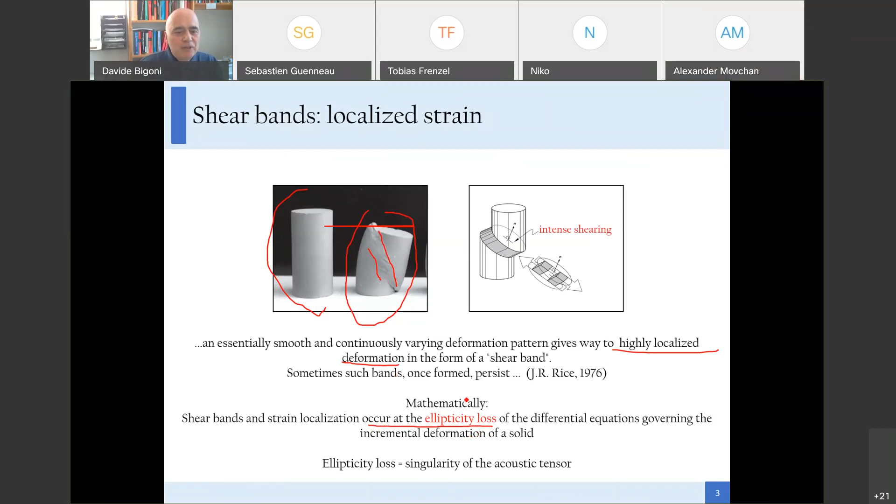Often shear bands persist, and these are examples of shear bands that I have encountered in my life. We see the sample from before, and here another example of a sample where the shear bands have an X shape—two inclined shear bands equally inclined with respect to the vertical direction.

Another example of the same kind of localization is this, where we see damage inclined into two shear bands. This rock, and also this other rock, which I like because this is a runestone. It's a photo of a sample exposed in the Museum of Edinburgh.

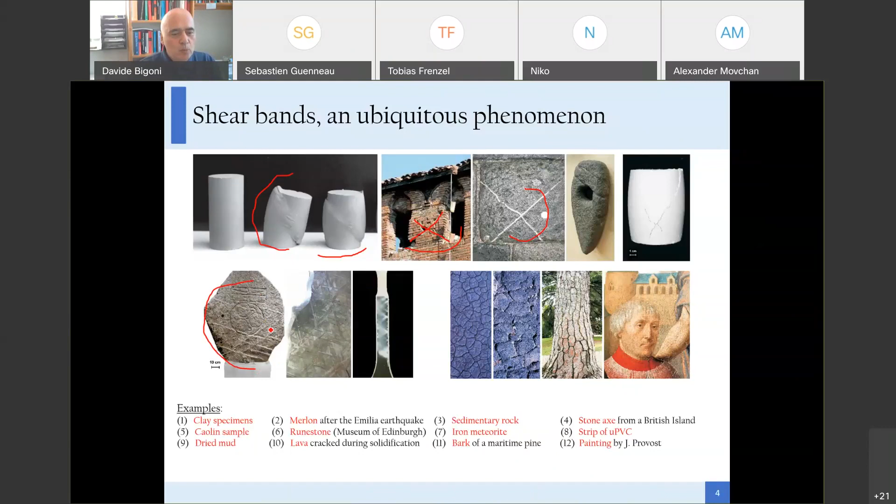I like to think that all these shear bands you may see here were considered by ancient people as signs of God. Other shear bands are here in an iron meteorite, and this is a piece of plastic where we see again the same shear bands.

Often what we see is the signature of shear bands, because shear bands often degenerate into a regular pattern of fractures. We see here fractures in mud, here in a tree trunk, in a painting, and so on.

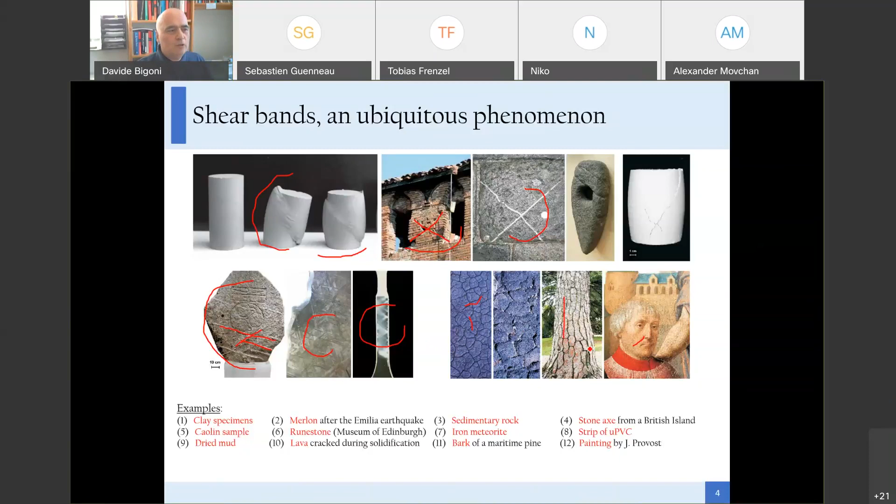So what I'm proposing today is the following. Usually shear bands are accompanied by large plastic deformation and just emerge before failure. So they come together with damage and eventually fracture.

Moreover, the mechanical features of shear bands are dictated by the material. For a certain material, there are a certain number of shear bands, a certain inclination. If we would like to change these features, that's difficult because we have to change the material.

Nowadays we are looking to architected materials. These are materials with extreme properties, for instance foldability, channeled response, surface effects, and we would like to have the possibility of switching shear bands on and off without any damage, because in this way we will pave the way to the use of a material that can be designed to produce these kinds of instabilities.

Our idea is to be able to exploit these instabilities for practical purposes. In this sense, shear bands have to occur well inside the elastic range and far from failure. Otherwise, we will not have the possibility of switching them off and on.

Shear bands should be designed to have desired features—inclination, number—and we would like to have a system to induce or inhibit the appearance of shear bands. All the mechanical parameters in our artificial materials, we would like to have rigorously determined, possibly analytically.

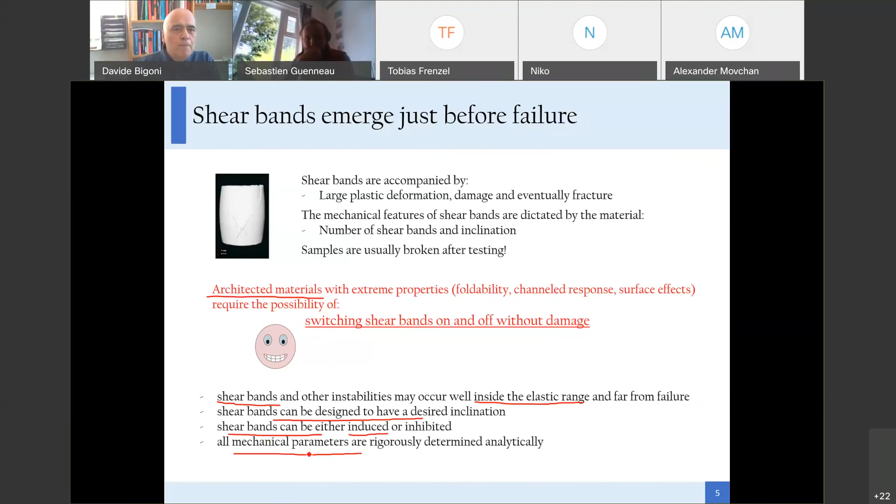So how to solve this problem? Well, I'm proposing you to use a specific kind of artificial materials that we see sketched in this figure.

So the idea is to use periodic two-dimensional grids of axial and flexurally deformable elastic rods. These elastic rods have to be axially preloaded in tension, as you see in the sketch, or in compression, and subject to in-plane incremental deformation.

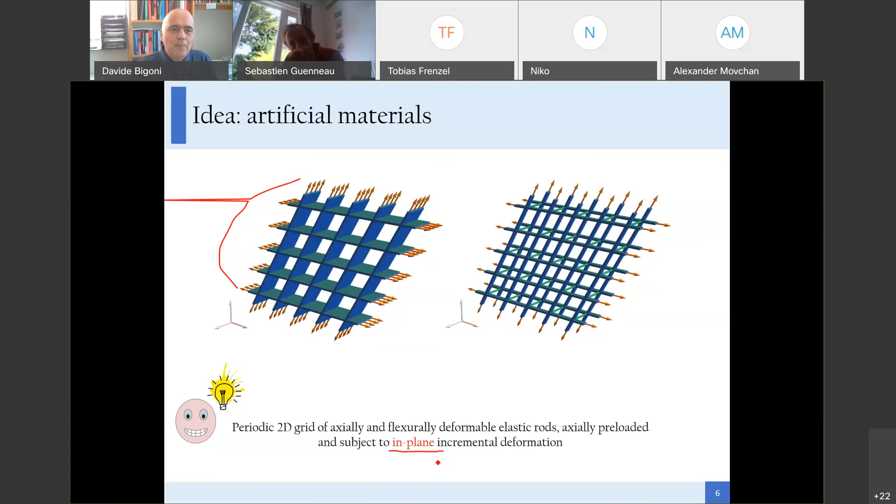I'm highlighting this concept of in-plane because in the literature there are a bunch of results for structures loaded out of plane, but in this case we are working in the plane. So every elastic rod is subjected to bending moment, shear force, and axial force. So the idea is to take a grid and subject it to tensile or compressive axial force, and then perturb it with a deformation inside the plane.

What we have to do to treat this problem is to consider the equations governing axial wave propagation and transverse wave propagation for time harmonic assumption. So we see that we have to deal with the mass density, the linear mass density of the rod, the axial displacement, the circular frequency, the axial stiffness of the rod, which is usually written as EA.

And now what we see is that these parameters depend upon the pre-stretch that we impose before the incremental deformation. So the first equation is for axial deformations, and the second equation here is for transverse vibrations, where V is the transverse displacement.

Omega is always the frequency, the circular frequency. Gamma, the linear mass density. B is the bending stiffness, often written as EI. P is the effect of the preload here. And eventually we see that we have also introduced the so-called rotational inertia, which means that our beam model is a Rayleigh beam model.

Of course, the Euler-Bernoulli model is recovered when gamma R is set equal to 0.

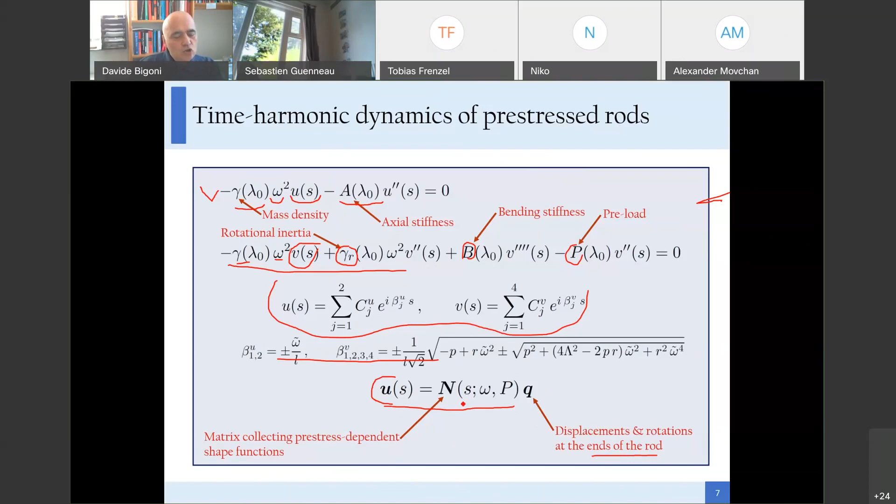Don't be confused about the name shape functions, because these shape functions are rigorously determined analytically, so there is no approximation here.

And finally, the potential energy contains the effect of the pre-stress P loading the elastic rods. So all these equations end up in a prestress-dependent stiffness matrix. There is nothing particularly new here—this stiffness matrix is known and has been determined analytically.

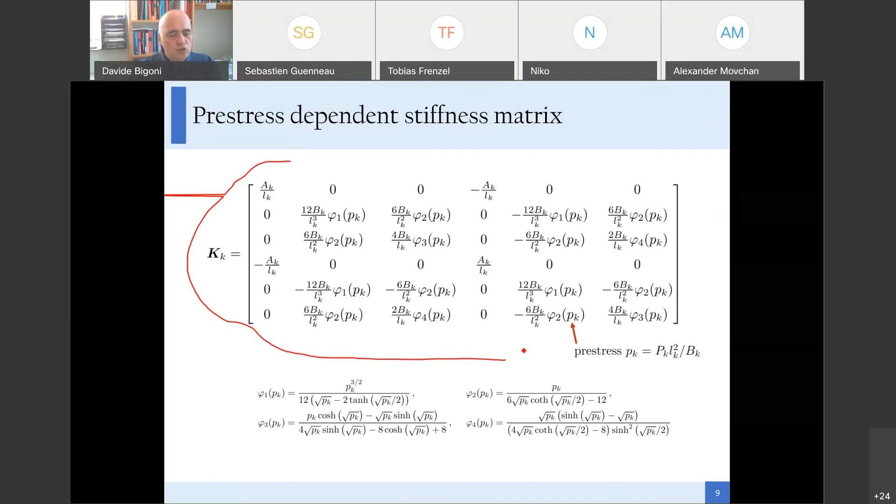And now we are in a position where we have to select what to do. So we can follow two ways: one way is to use homogenization, which I will speak of in a few minutes. The other way is to directly use these equations for the grid, introducing a Floquet-Bloch technique.

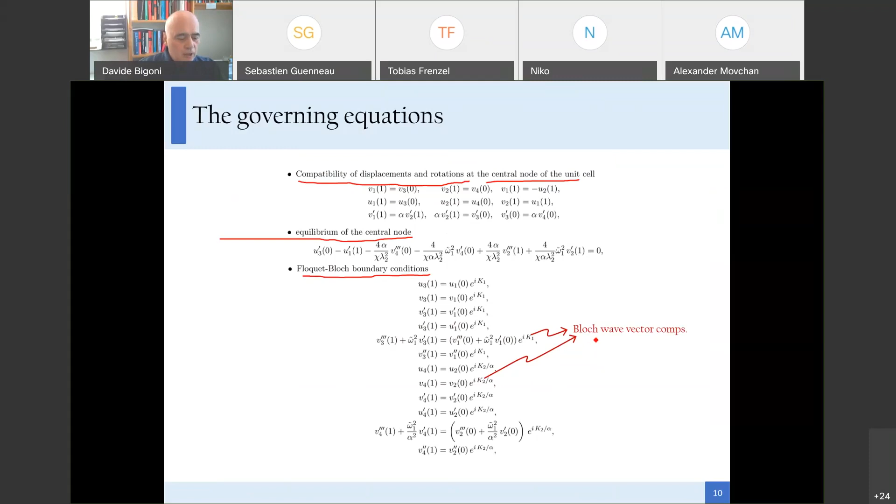If we do this for the grid of the beams, we arrive at a dispersion equation, which depends on the aspect ratio between the length of the rods, the ratio between the cross-sectional areas of the rods, and the slenderness of the rods.

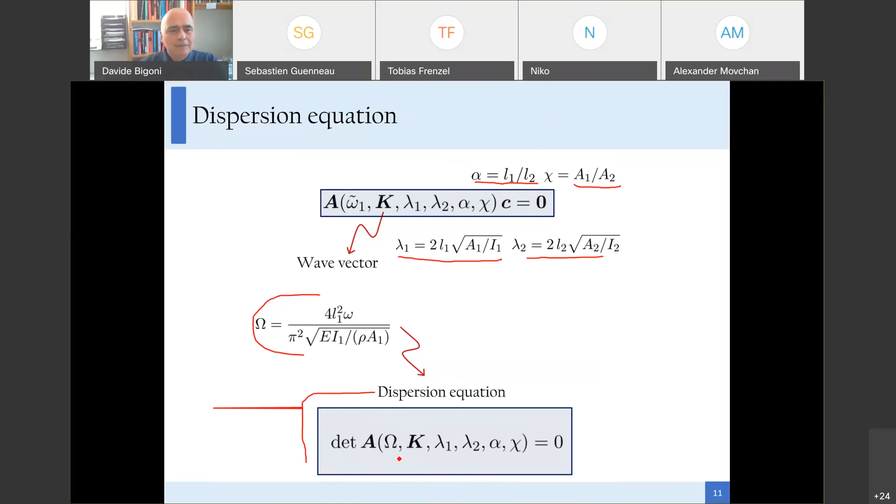Eventually, through a renormalization, we arrive at a final expression for the dispersion equation, which is this one. This equation can be solved numerically up to a desired precision, because the solution of this equation is not a real problem. In this way, we obtain results in terms of dispersion surfaces.

So these surfaces are very popular nowadays, but to tell you the truth, they leave me a little bit cold, because it is something that is not particularly interesting to see.

For instance, on the left we see the dispersion surface obtained in the limit of the Euler-Bernoulli behavior. In the center, when the Rayleigh beam enters into play, we may see that the difference between these two is only evident at high frequency, and this is expected because rotational inertia only plays a role at high frequency.

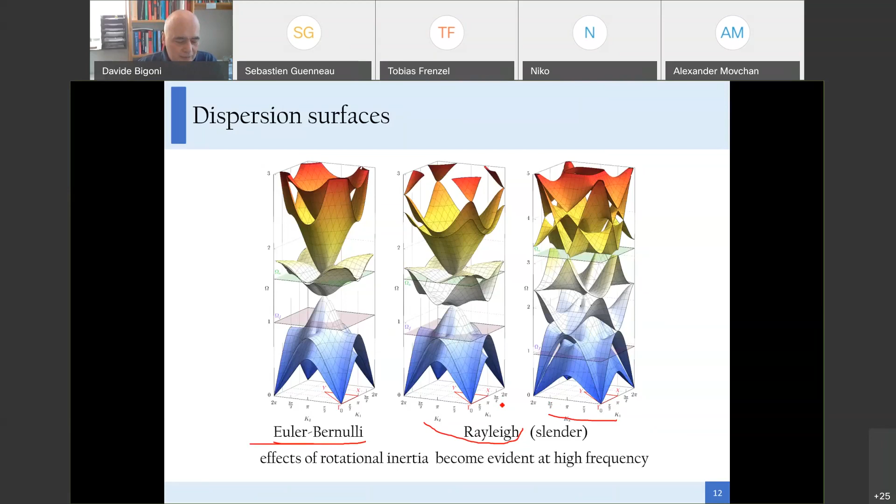And on the very right, we see another example where we have played with the slenderness of the elastic rods. So I don't have much to say about these surfaces, except that we can try to hunt for special features.

And we may see here a couple of these special features. For instance, on the left, we see here a flat band. This means that we have an infinite set of standing waves propagating all at the same frequency, which is exactly 1.971. And this occurs at a slenderness ratio equal to 6.192, exactly at that slenderness and exactly at that frequency.

Or if we look to the right, we see other things that we can do with these dispersion surfaces. We can look for Dirac cones. There is one here, another is there. There are many more, so another is here. But this is not the thing I would like to speak about.

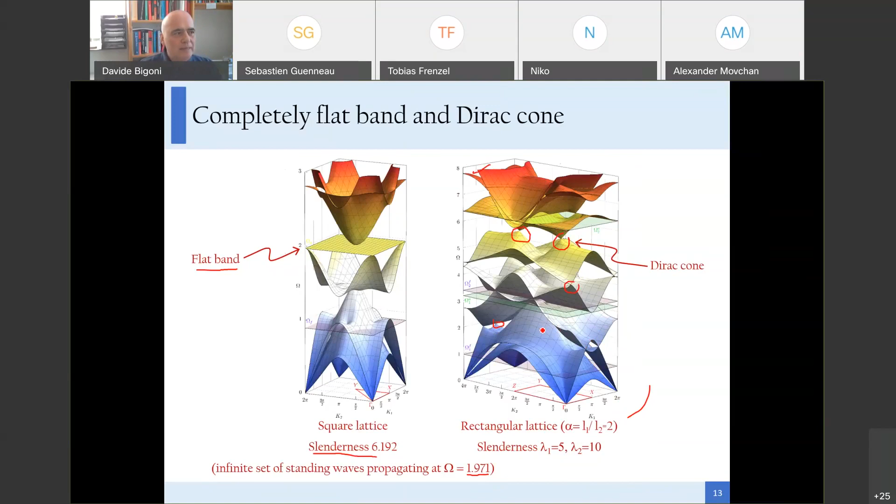I would like to concentrate on the second possibility. The second possibility is to introduce the homogenization of the lattice to get an equivalent solid, because our goal is to obtain materials which behave in a particular way, determined before doing calculations, possibly analytical calculations. So we would like the two-dimensional grid to behave as a material.

And so this is the homogenization problem. We start from a stress-free configuration. The stress-free configuration is pre-stressed, say, in tension, but it can be pre-stressed also in compression, to get a grid which is larger than the initial configuration. And the current configuration is perturbed through an incremental macro deformation, which introduces bending, shear forces, and axial incremental deformation. So the lattice is two-dimensional, periodic, and subject to in-plane incremental deformation.

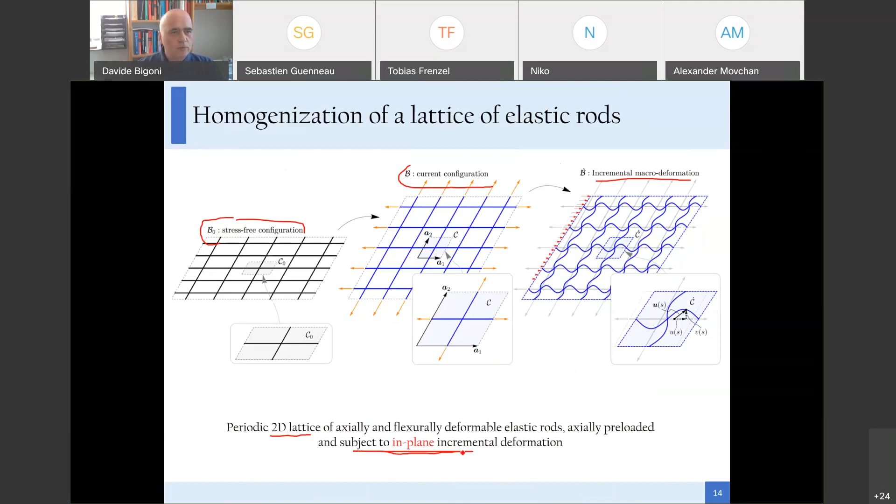So if we want to continue with the way of homogenization, we have to introduce a unit cell. This unit cell is generic, and in fact, we have developed a tool which allows us to treat completely generic cells, and we have to impose the conditions coming from the spatial periodicity.

In dynamics, they are called the Bloch theorem, which is this. In statics, they are called the Cauchy-Born hypothesis. It is a way to enforce spatial periodicity of the system. So this is from the point of view of the lattice.

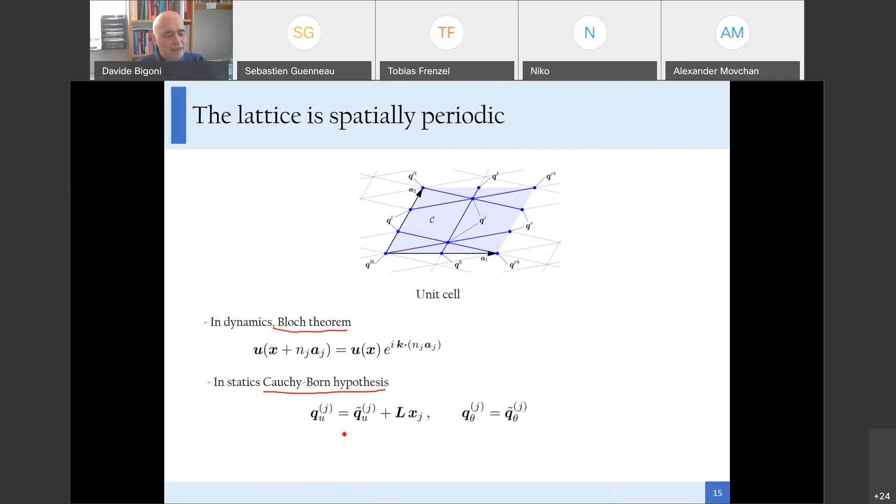Now let's have a look to the point of view of the continuum. We have to compare with the continuum, which is initially stretched homogeneously and then is subject to the incremental deformation.

So the form of the comparison material of the equivalent continuum is standard. And what we do have to impose in the homogenization scheme is to match in statics the first order energy in the continuum with the first order energy in the lattice. And similarly, we have to enforce matching between the second order energy in the continuum and the second order energy in the lattice. This is what we have to do.

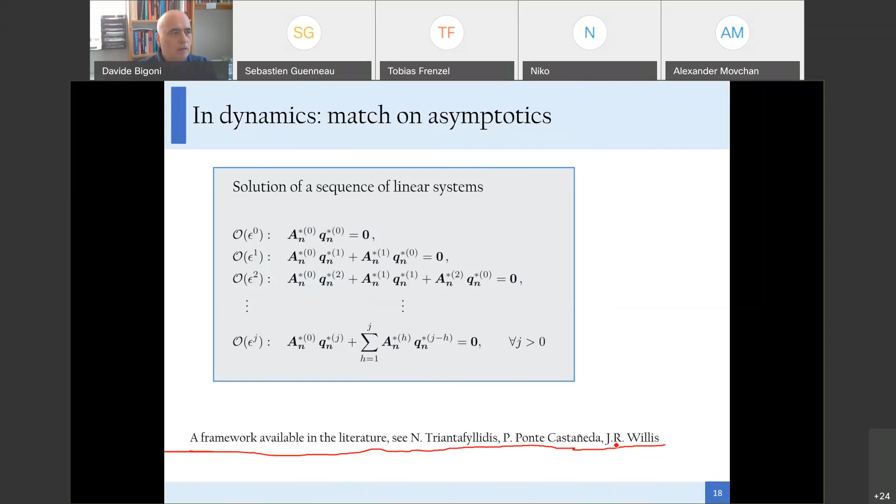So before showing the results of the homogenization of the lattice, I would like to speak about the role of homogenization. So I would like to put a question on the table: when homogenization does work and when does not. So I would like to start with a few examples of experiments that I have found in the literature.

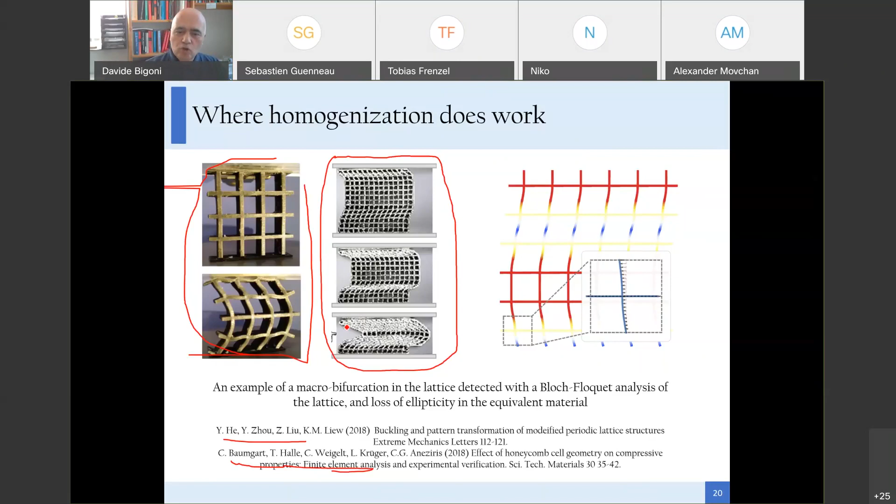We see it here. This is the analytical computation of this situation, and we see a form of global bifurcation. When the grid has a global bifurcation, it has been proven by Triantafyllidis and Ponte Castañeda that this instability corresponds to loss of ellipticity, and as I said, it corresponds to shear bands or localization of deformation. This is the case where homogenization works.

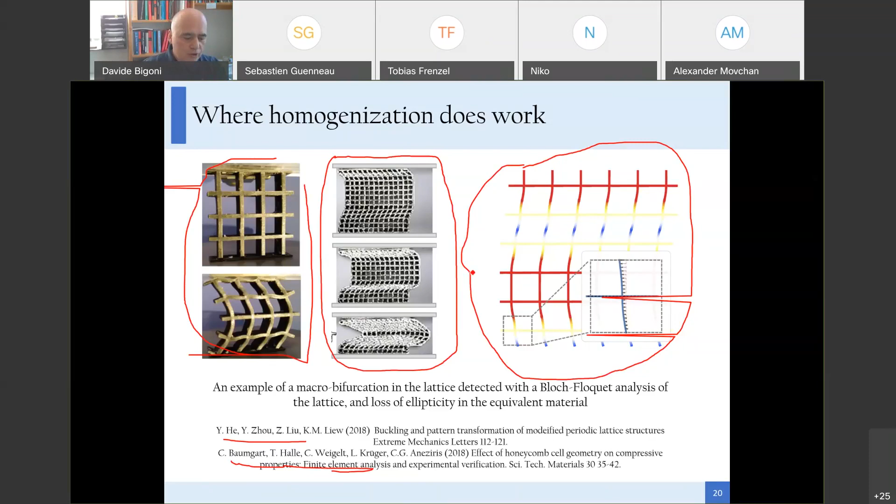This other case is an experiment that I did in my lab, and it is a compression, a confinement compression of a stack of drinking straws, which are arranged initially in a hexagonal geometry. And then when we squeeze the sample, we see almost immediately the formation of an ovalization.

We see that the ovalization quickly spreads throughout the sample. After this ovalization, we eventually see the localization of deformation into bands, and this localization progressively accumulates. But the first instability is this kind of ovalization.

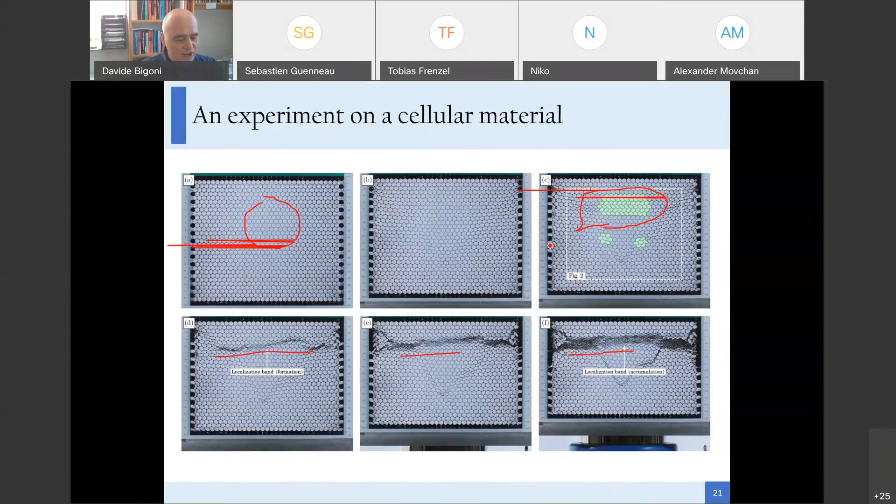If we analyze this instability from the theoretical point of view, we came to the conclusion that this is an example of micro bifurcation. It's a bifurcation occurring in the lattice, but it's not an instability for the equivalent continuum. So the equivalent continuum does not see this kind of instability, and it does not work as a material able to capture it.

So this is the situation: we have two possibilities when we load a grid of axially preloaded elastic rods. The first possibility is the early occurrence of a microscopic bifurcation. In this case, the homogenization scheme does not work because this microscopic bifurcation remains undetected in the equivalent material. So from this point of view, the equivalent material is somehow useless.

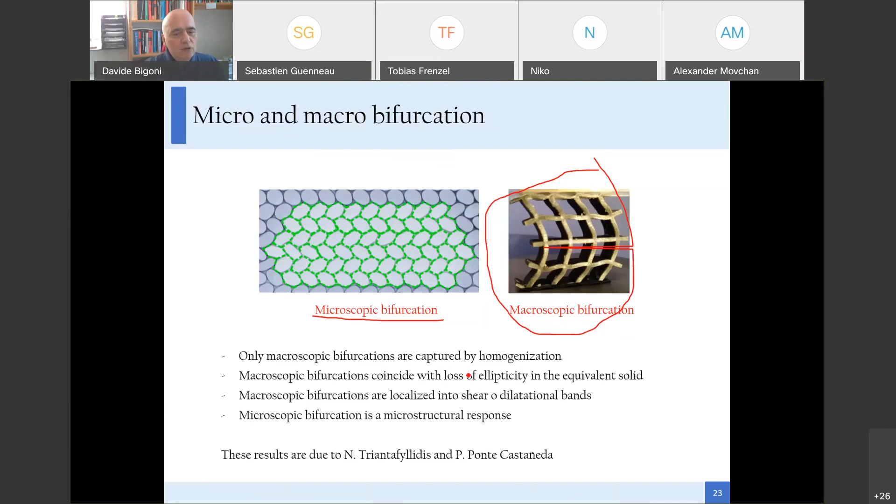In other cases, we see something different: a macroscopic bifurcation like this one, detected both in the grid, in the structure, and in the equivalent continuum. In the equivalent continuum, it corresponds to a loss of ellipticity of the equations, meaning a possibility of localized deformation in terms of shear band or dilational band. These results are not our own, but have been demonstrated mainly by Nick Triantafyllidis and Ponte Castañeda.

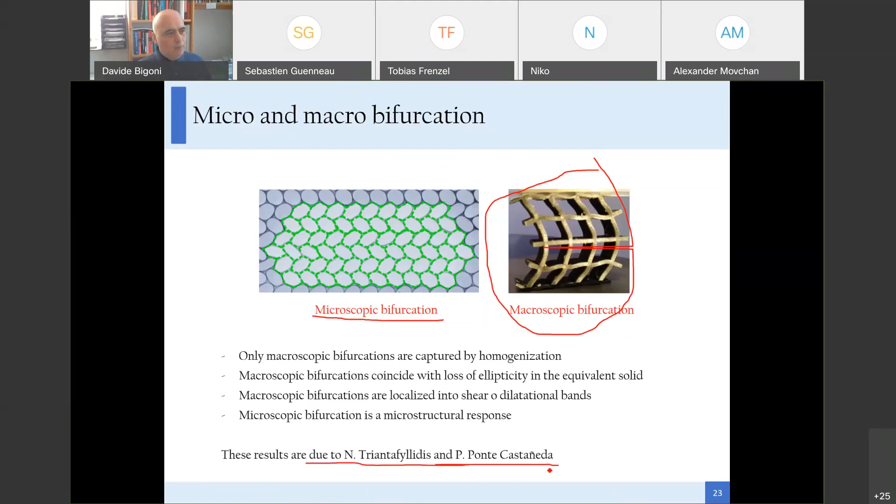Now I would like to show you an example. We have selected this grid of inclined rods. The rods are inclined at angle alpha and have been reinforced through linear springs, which only provide transverse reinforcement to this grid. With this structure, we are able to apply the homogenization tool and define the equivalent material. The first thing we have to do is obtain the prestressed tensor in the equivalent solid.

We see that the formula is pretty nice. It's this one: on the left, the Cauchy stress in the equivalent material. Alpha is the inclination of the grid, L is the length of the rods, and P1 and P2 are the two components of prestress in the elastic rods. This is first order.

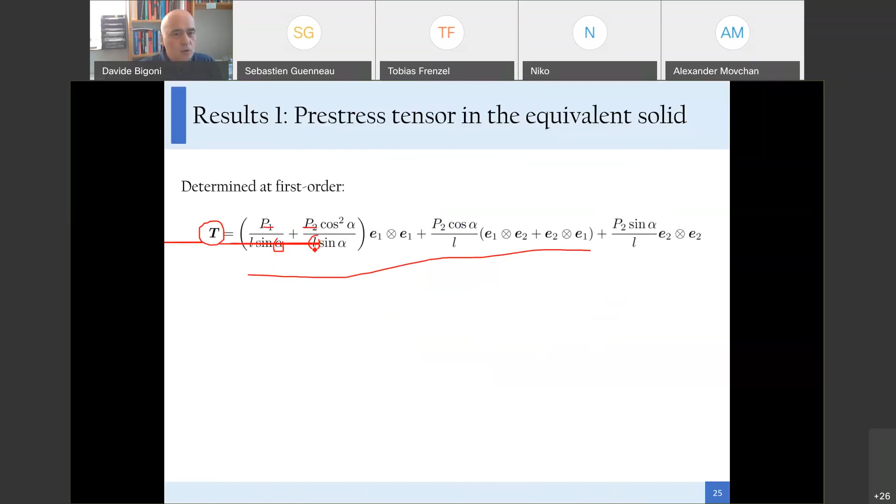But now, of course, we have to go to the second order, which is the most important part, and things become a little more complicated. We have 10 components for the elasticity tensor C, listed here. Don't be afraid of this formula, because they are all analytical and can be treated easily using a symbolic manipulator. So we can write down and use this equation to design our material. Our goal is this equation: define an artificial material that can be designed by us, since we can change the inclination of the rods, alpha, the ratio governing stiffness, the slenderness of the rods, and so on.

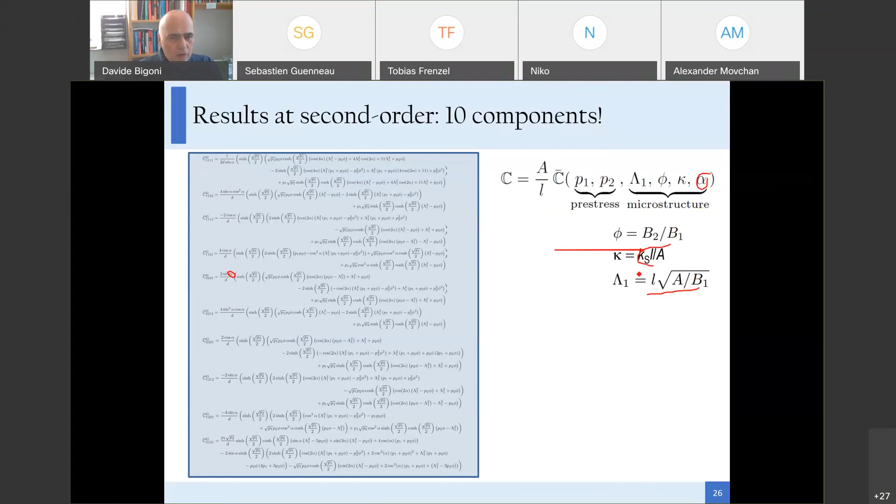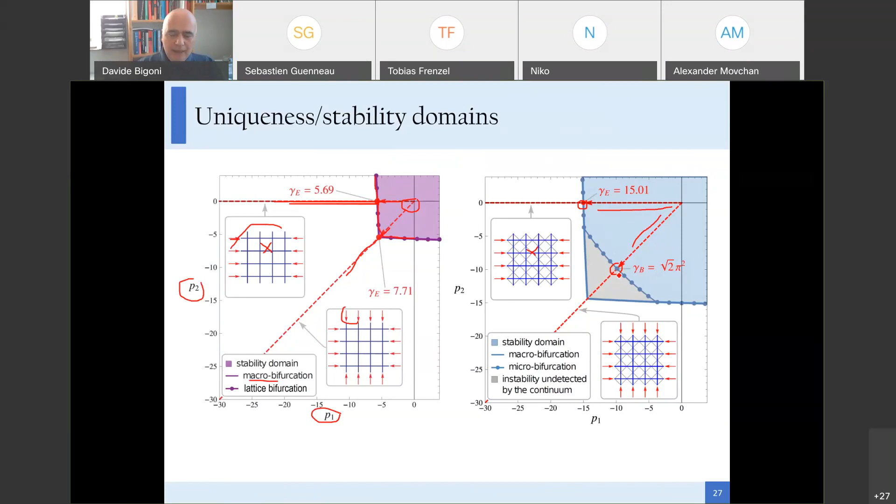We have introduced these conditions, and now I would like to show you something, because you might wonder why a macro bifurcation should correspond to a localization of deformation to a shear band. Maybe this is not yet clear. To make this clear, we have to reveal the existence, the possibility of localized deformation. How to do this? We use a strategy we developed years ago.

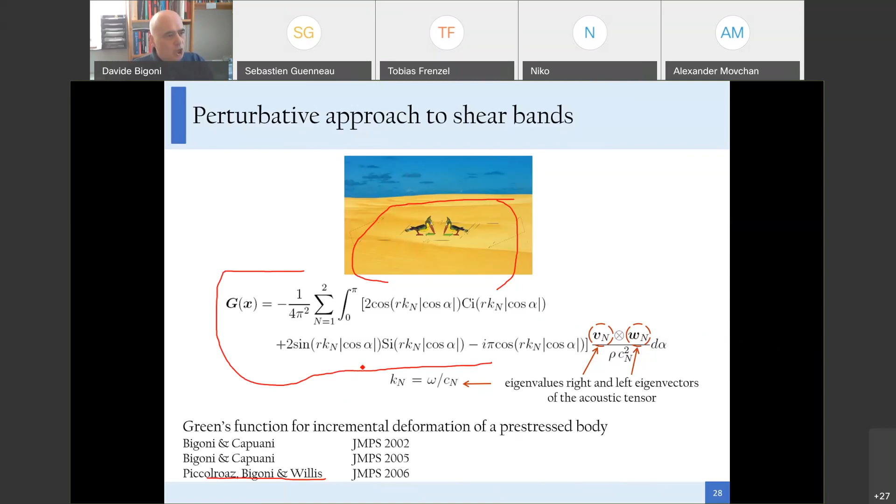This Green function can be given an explicit form in this way. This formula was obtained some 10 years ago or so. We can use this formula analytically to see how the material behaves near the border of ellipticity loss, the comparison material and the grid. And here we have the results.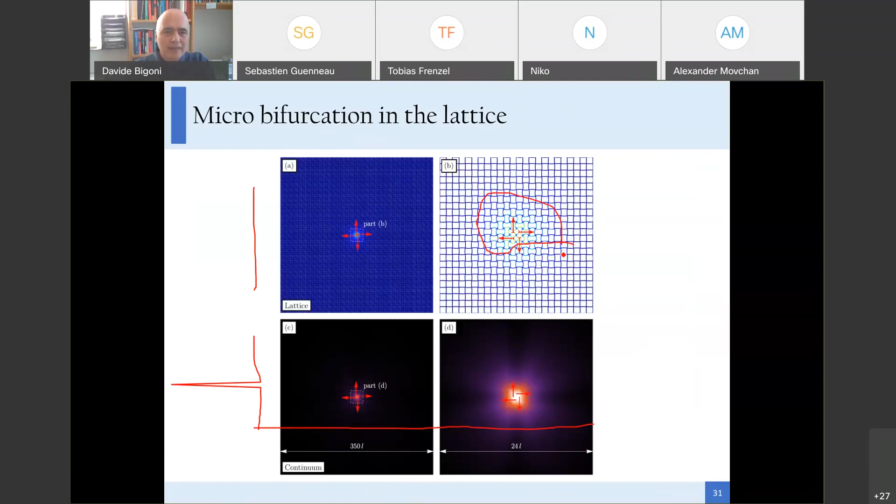We may see this more clearly here. These are results obtained with finite elements. We are applying a dipole into the grid, and this is what happens when we are exactly at the load for micro bifurcation.

So if we are exactly at that load, we don't see much. But if we move just beyond, say P1.05 or P1.1, the critical load, then we see there is a sort of explosion of the material. The micro bifurcation, which is undetected in the homogenized material, spreads throughout the whole body.

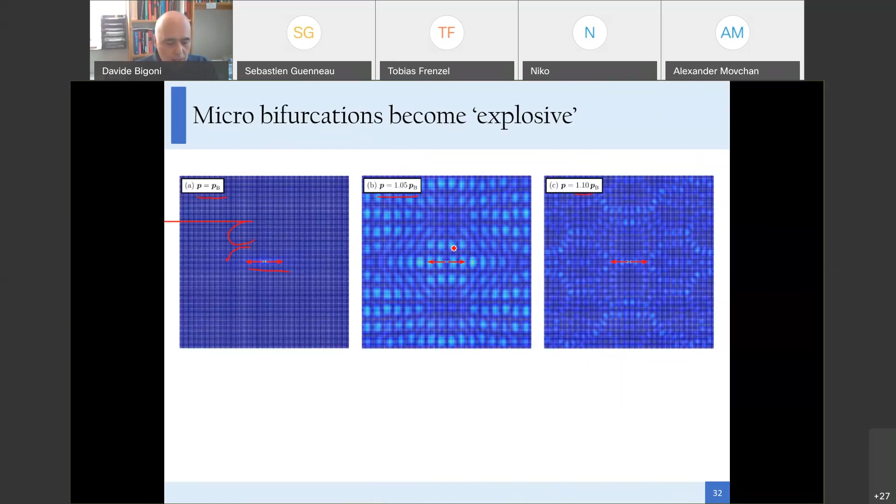So I would like to continue presenting results on the dynamics of shear bands. After 40 years of research in shear bands, many problems are still unsolved. One of these problems is: how do shear bands behave under dynamic excitation? Now we are in a position to try, because we have a homogenization scheme working for dynamics, and we also have a perturbation, a Green function, working for dynamics.

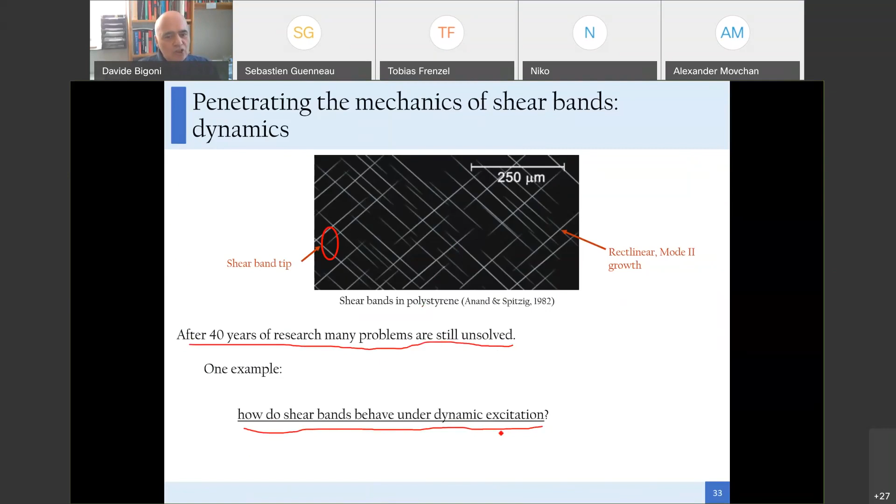So this is our goal: to look at homogenization in dynamics using Floquet-Bloch wave asymptotics. In this case, instead of the elasticity tensor, the tool brings us immediately to the acoustic tensor. Then we have to derive the elasticity tensor, if we need it, by taking the derivative with respect to the propagation of waves of the acoustic tensor.

Now, how do things work here? This is a result obtained for one of the cases where macro bifurcations dominate, so the first bifurcation is the macroscopic bifurcation, and homogenization here works well. These graphs are slowness contours evaluated analytically, and what we see is that initially, at null prestress, there is perfect coincidence between results obtained in the lattice and results obtained in the equivalent continuum.

The same thing here, where the prestress is already 0.8, the critical value, and here we see a very small discrepancy. Can you see it? It's a red dot. The red dot is the only discrepancy between the slowness contours for the lattice and the equivalent continuum.

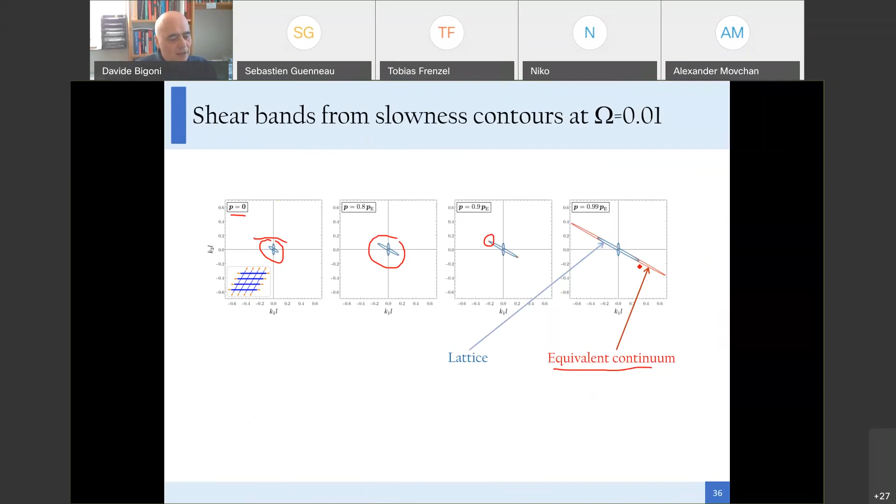Eventually, when we are at the shear band formation, the discrepancy between the behavior of the lattice and of the equivalent continuum becomes larger, but nevertheless, the equivalent continuum captures very well the shear band formation in the material. What we see here is the real shear band. In this case, everything works well, and we are in a condition to design this material and use it.

This is the final result I'm showing you about this topic. It's again the comparison between the lattice, where these results on the upper row have been obtained through finite elements, and the behavior of the continuum, where these results have been obtained using the equivalent material and the Green's function for the equivalent material. So the lower row are all analytical results, and we see how things go at increasing prestress, up to very close to the border of ellipticity.

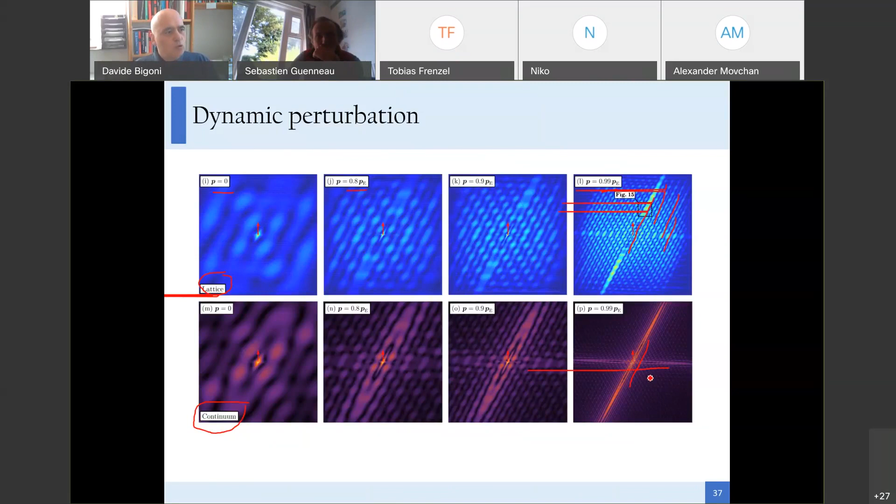We see that the grid and the equivalent material behave almost the same, and going close to the elliptic boundary, we see the formation of planar shear bands emanating from the source, highly localized into a narrow shear band. We see it in the grid, and we clearly see it in the equivalent material. So here the message is we can use homogenization, we can design composite materials, in particular grids of elastic rods, and we can do this to obtain interesting properties.

Now I would like to speak more about metamaterials. In the field of metamaterials, people are hunting for unusual properties - big names, quantum mechanics, negative refraction, total reflection, platonics, and so on. So I would like to show you what we can do with this simple grid of prestressed elastic rods. This is the idea.

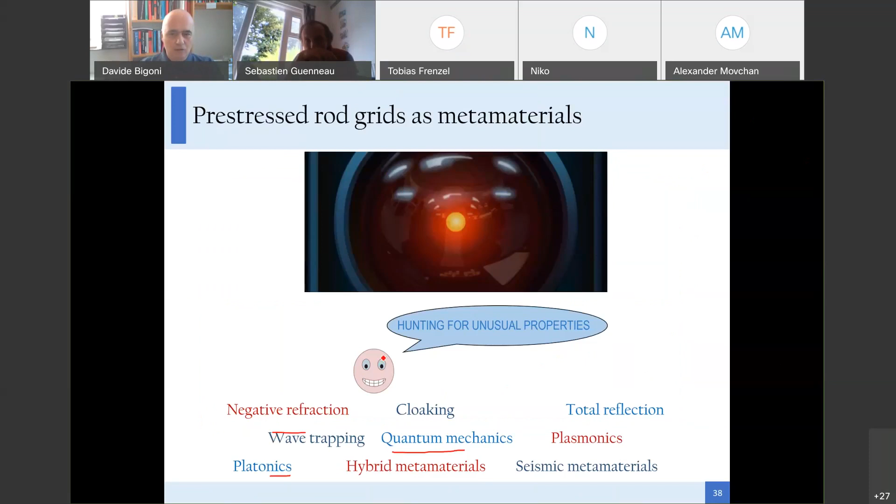We have an infinite grid of elastic rods, and a layer of these rods is prestressed by a uniform tensile force, P. This is actually an old idea, because we proposed this strategy together with Max Gei and Sasha Movchan already more than 10 years ago.

So what we can do with this simple arrangement? Why use the prestress? Well, to use the prestress is because it's very easy to add and remove. We can tune the prestress as we desire in a very simple way. We don't need to change the grid, we only have to apply loads.

So what can we obtain? Can we obtain this very strange phenomena? Well, this is an example - this is, for instance, total reflection. We see here a planar wave hitting the interface with a layer of vertically prestressed elastic rods, and we see that we obtain total reflection - the wave is completely reflected.

Here we see another example. We have a pulsating source in terms of a pulsating concentrated bending moment. Two waves are generated, and they hit this layer of prestressed beam, and they are both totally reflected. So this is an example of total reflection obtained with a simple layer of prestressed elastic rods.

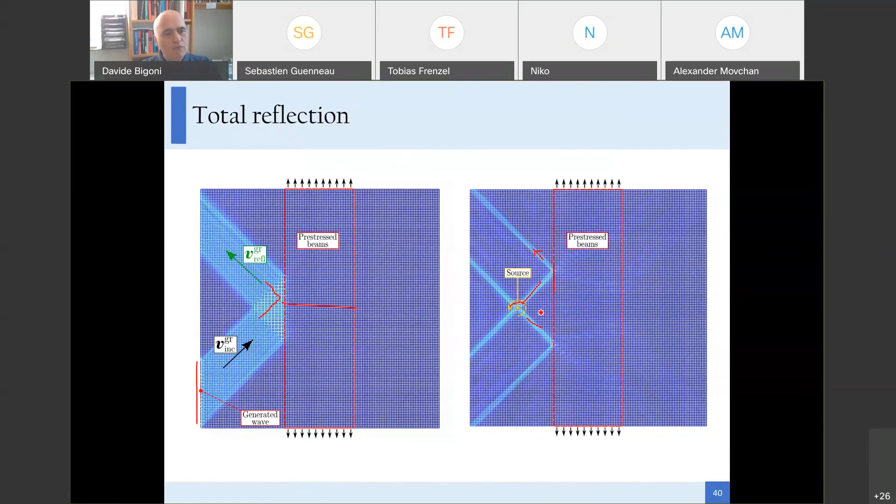And this is an example of negative refraction. We see again here on the left the plane wave arriving. It hits this interface with a layer of prestressed beams, partially reflected and partially refracted with negative refraction. And if we use the pulsating source, we see that these waves hit the layer and then refocus into an image - an image is formed. It means that the prestressed beam layer behaves like a flat lens.

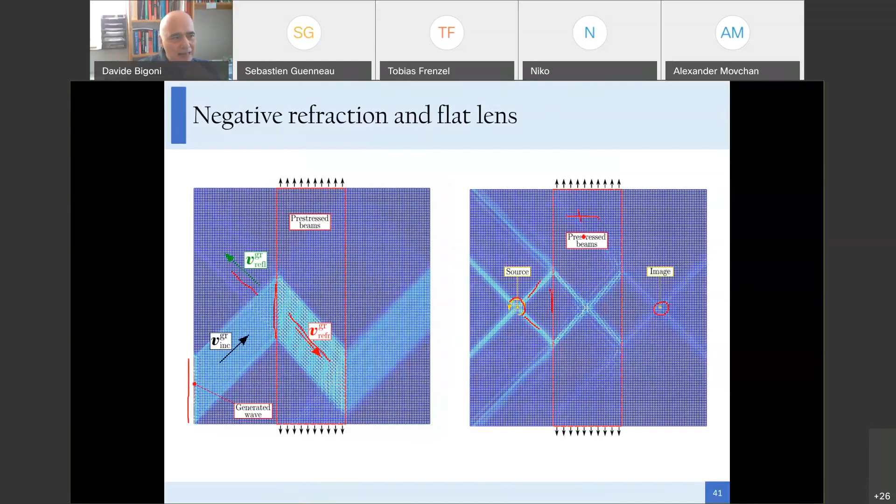And we can also obtain trapping and focusing of a signal. In this case, we have trapped the wave in an S-shaped channel. And in this other way, we have many things occurring because we have one layer here, another layer of different prestress there - the same layer here, another there - and we see again negative refraction, a lot of things happening here.

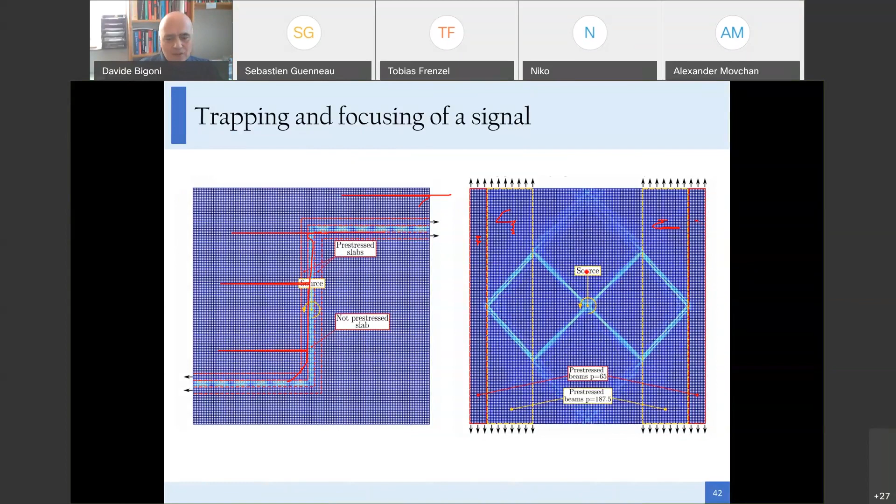Then you might say, well, can we do this even simpler? Can we use simply the slenderness of the elastic rods to obtain these effects? Well, the answer is positive. Yes, we can simply play with the slenderness and again obtain total reflection, trapping of a wave, negative refraction, and as you might see here, the flat lens effect.

Now I would like to perturb you by asking, why use exotic features when we can do this with simply prestressed beams or beams with different stiffness?

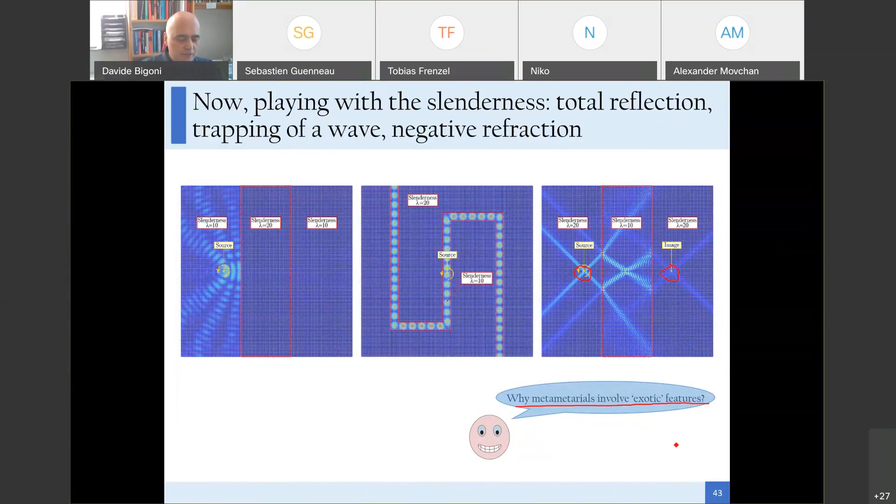Now I would like to spend a few minutes on something which is a digression in my talk. For many years, probably ten, I've been playing with elastic rods and plates in the fully nonlinear range. Until now, what we have seen was all confined to linear behavior. I am convinced there is a big world beyond linear elasticity, and we can use many effects we have discovered to think about nonlinear elastic metamaterials.

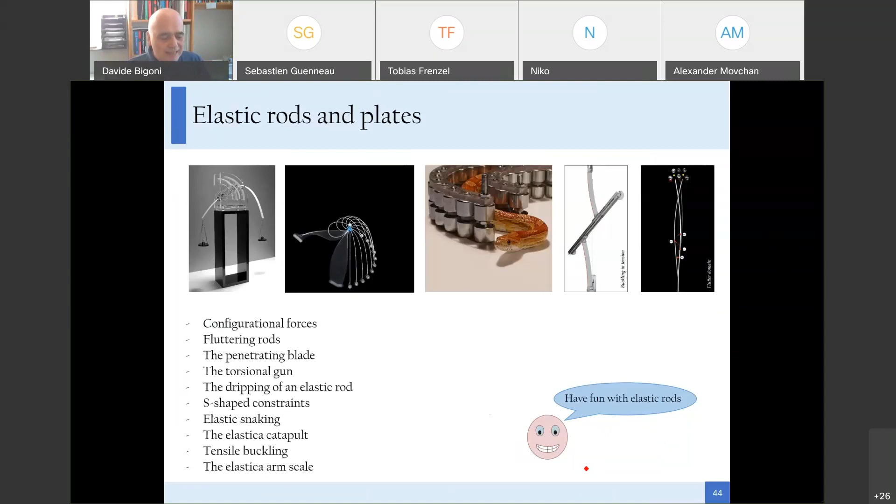I would like to give two very quick examples, without taking too much time, to show what can be done with the nonlinear theory. The first topic is the so-called dripping of an elastic rod, based on a formal analogy between the differential equation governing the equilibrium configuration of an elastic rod and the shape of a free surface of a fluid meniscus or a drop.

This image, which looks like a sketch, is actually a photograph of a real experiment where we poured some resin into this container. The shape of the meniscus of resin fits exactly with the shape of a nonlinear Euler elastica loaded in tension. So the idea is to exploit this analogy, and we did an experiment to show we can induce an elastic rod to take the shape of a droplet.

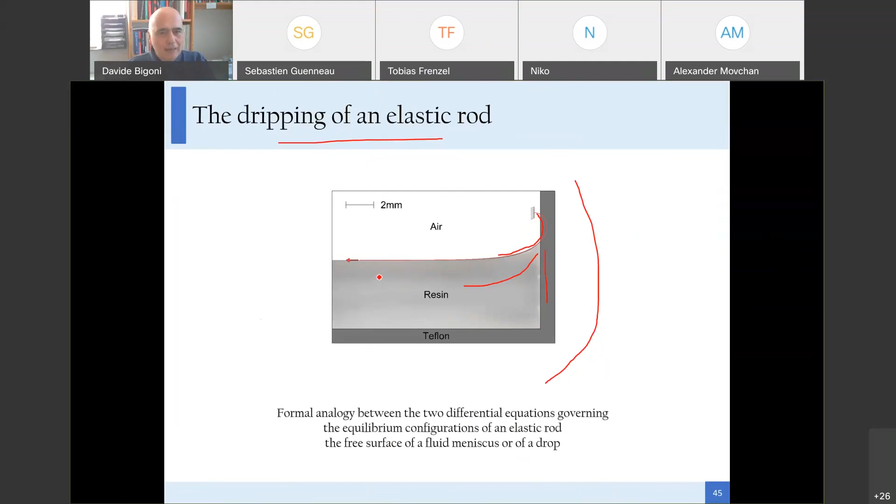Now this is the experiment. On the left, we see a movie of the formation of a water droplet. On the right, we see the dripping of an elastic rod, loaded in the center with a vertical force, and it takes exactly the shape of the droplet. We see this movie again. So the idea is to show that the analogy of the equations can be exploited to obtain non-trivial effects.

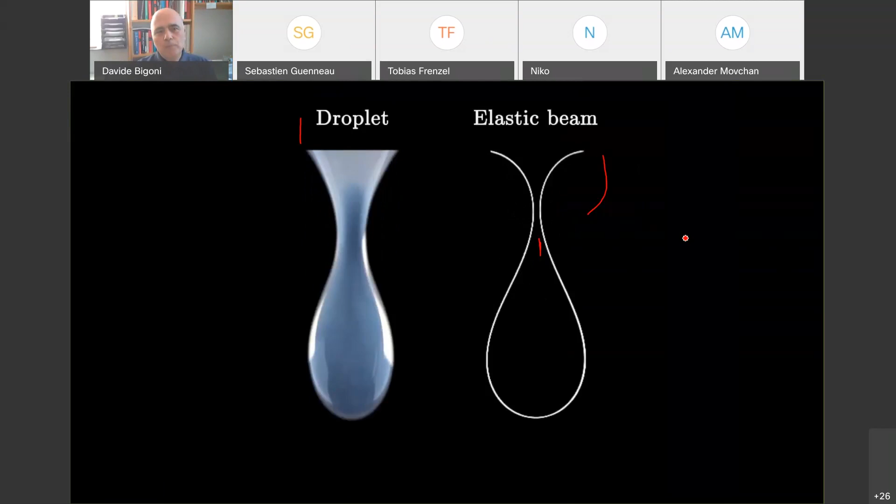The other thing I will briefly tell you about is connected with the concept of configurational forces, which we pointed out in the last six years or so. Let's speak of this experiment: we have a lumped mass attached to the end of an elastic rod. The elastic rod is free to slide without friction inside this sliding sleeve. Imagine the elastic rod is rigid or very stiff.

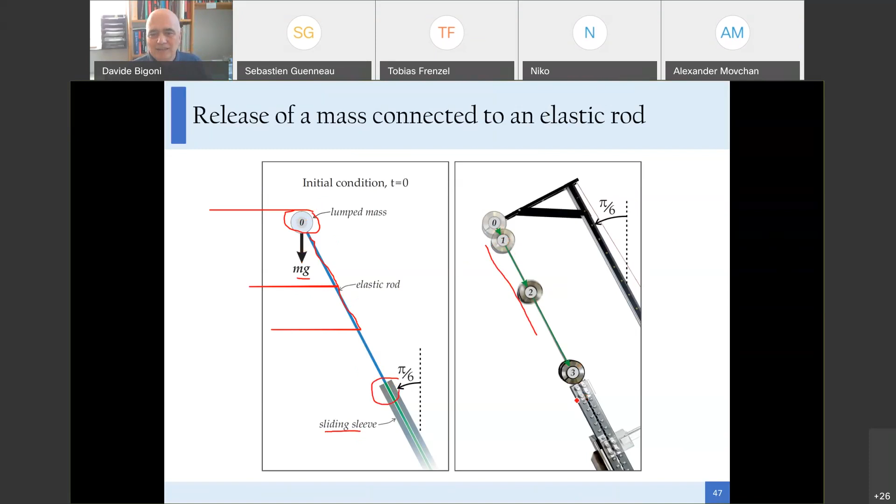When we release this mass, which is subject to gravity, what happens is sketched here: simply the mass goes down and the elastic rod slips inside the sliding sleeve, nothing more. But things become much more intriguing when the deformation of the rod comes into play. Imagine this is the rod and we release this mass — what will happen is that the rod starts oscillating, with nonlinear vibration.

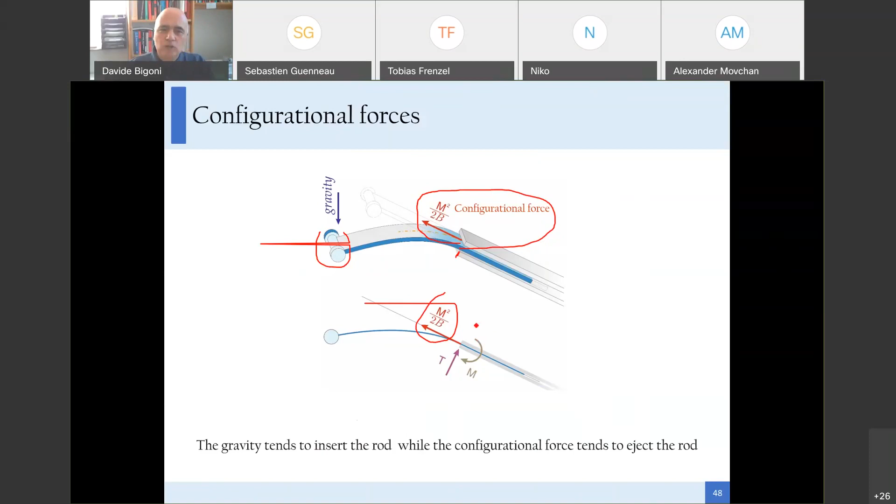We have proven that this vibration generates a configurational force proportional to the square of the bending moment, and this configurational force tends to eject the elastic rod. So the configurational force works opposite to gravity: gravity tries to make the rod slip inside the sliding sleeve, but the configurational force tries to eject it. I will show you an experiment where we release the mass and see the elastic rod slipping inside and outside the sliding sleeve as a consequence of the configurational force. This is the experiment.

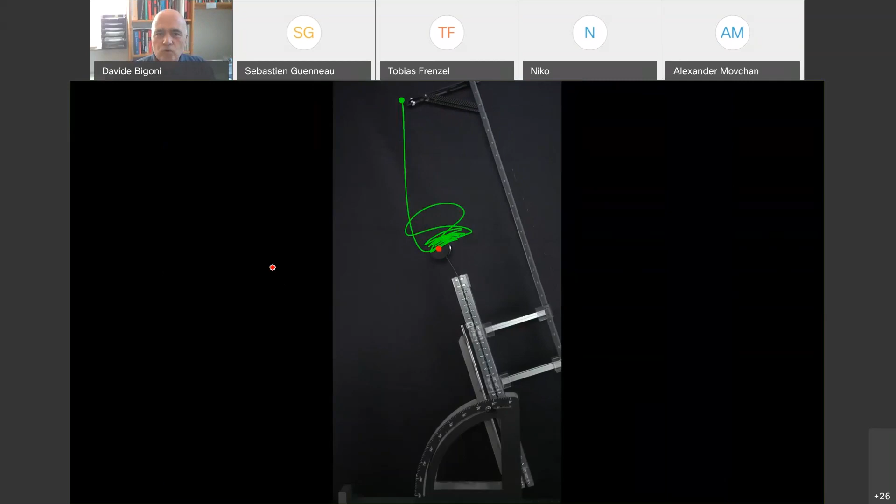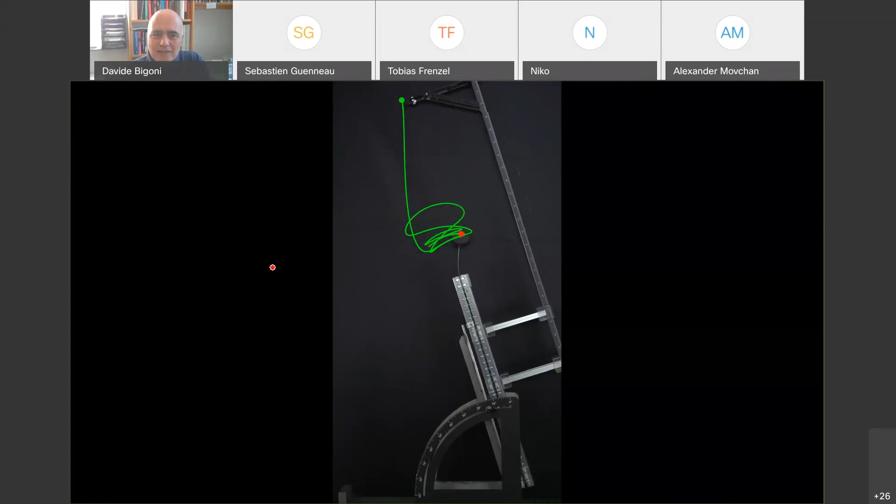There is mass tracking, so we see the path taken by the mass. Now we see the configurational force ejecting the mass — now inserting, now ejecting again, going out, going in, now stopping. Here the configurational force is balancing gravity exactly, and now it slowly goes inside the sliding sleeve. So it behaves more or less like a nonlinear oscillation: slips inside initially, then goes outside because the configurational force is very high, then slips inside again, then outside, then stays because the force balances gravity, and eventually goes inside.

I'm convinced that all these nonlinear effects can be exploited in the field of metamaterials. But let me now conclude my talk by speaking of the last topic for the day, and I would like to come back to metamaterials. I introduce a new research team: Diego Misseroni, associate professor in my group, and Professor Sasha Movchan, who is the pusher of metamaterials in my life — he introduced me to this research. I would like to speak quickly about invisibility and cloaking for flexural vibration.

So what is the point here? What is invisibility? Imagine that a vibrating plate contains an inclusion — in our case, it's a void. This inclusion usually perturbs the ambient vibration. We are looking at the condition where proper cloaking of the inclusion makes it invisible, in the sense that the inclusion does not disturb a given ambient vibrational field.

Actually, this is an old story in statics, where it was called neutrality, research going back 50 years or so. People in statics and elasticity were struggling to make inclusions neutral. We may see an example from work done many years ago with Walt Drugan and Katia Bertoldi at the University of Trento, where they were both working, Katia as a PhD student and Walt as a visiting professor. Here there is a void which has been reinforced with inclined fibers.

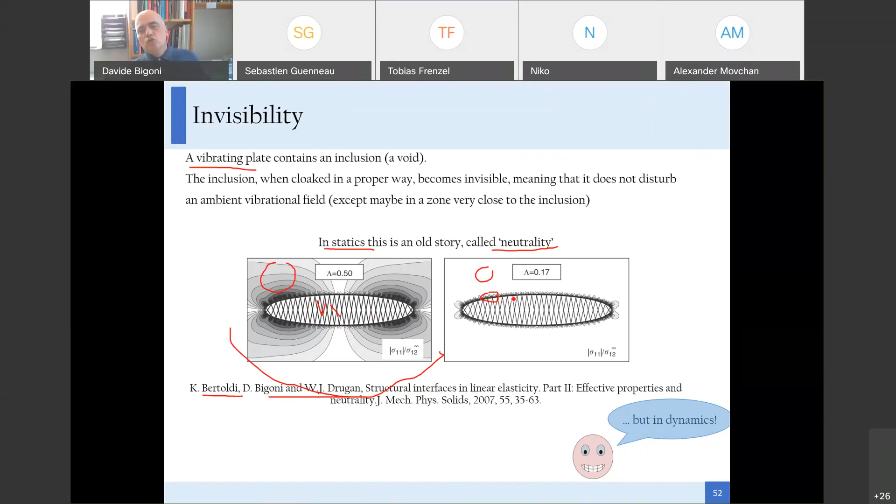Well, this is in statics, but I would like to speak about dynamics. So, of course, dynamics changes all this situation.

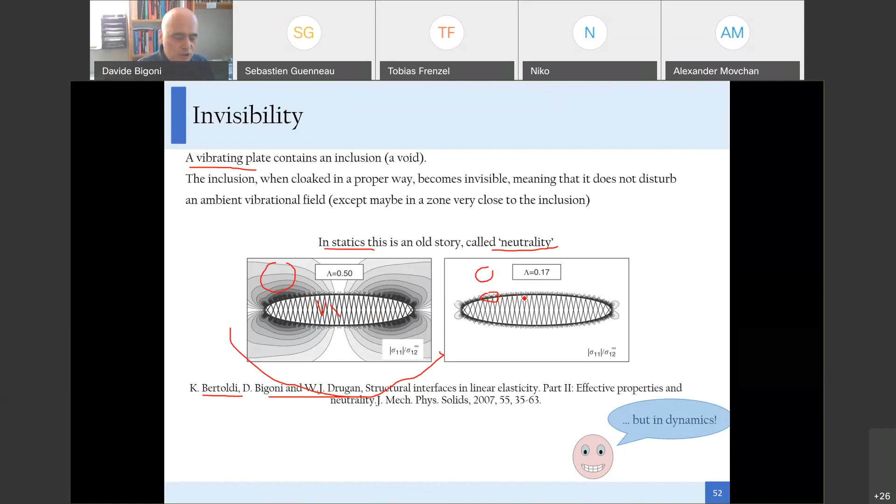First of all, I would like to mention what I have called the 7 golden rules of cloaking - the 7 requirements for cloaking. In my personal point of view, cloaking should be based on simple technology, so my goal is to avoid so-called exotic materials, or even worse, anisotropic density, gyroscopic effects, and so on. Then the cloaking, in my view, should be thin, because a very thick cloaking introduces a lot of problems. The same thing works for assuming that the cloaking should satisfy a small ratio between the dimension of the hosting medium and of the cloaked object.

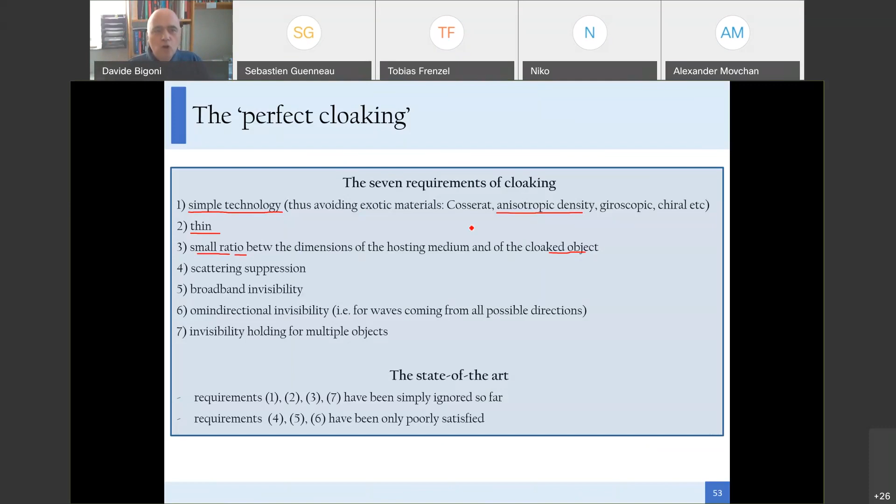What do I mean with this? Imagine we have a skyscraper, and imagine I go close to a column of this skyscraper. I take a drill and I drill a little hole in a column. Do you think the skyscraper will be affected by this? Of course, if the hosting medium is huge and the inclusion is very small, it is expected that the disturbance will not affect much. So a cloaking which works properly should work for a small ratio between the dimension of the hosting medium and the cloaked object.

Of course, cloaking should provide scattering suppression. It should work in a broadband, and should verify omnidirectional invisibility, for waves coming from all possible directions. And finally, the cloaking should work also if we try to make invisible several objects, not only one.

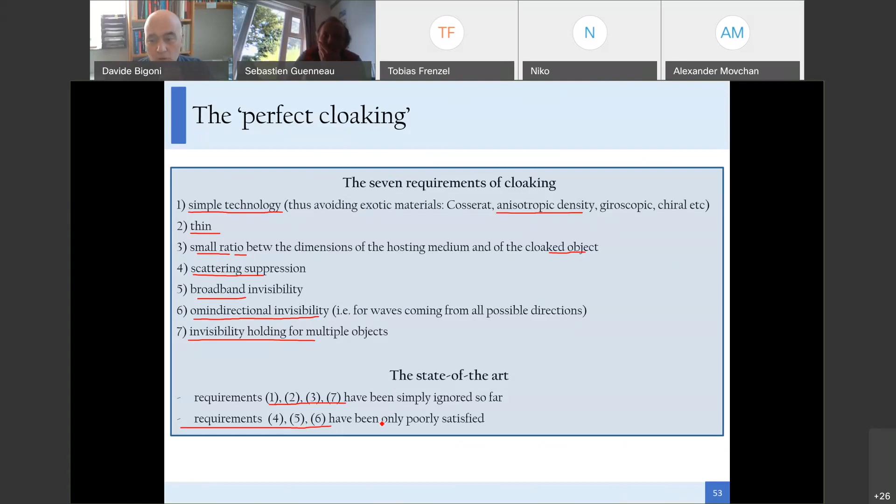The state of the art here is very simple, because requirements 1, 2, 3, and 7 have been simply ignored so far. Requirements 4, 5, and 6 have only been partially satisfied. So instead of speaking of analytical results, I would like to concentrate on the few experiments available in this field.

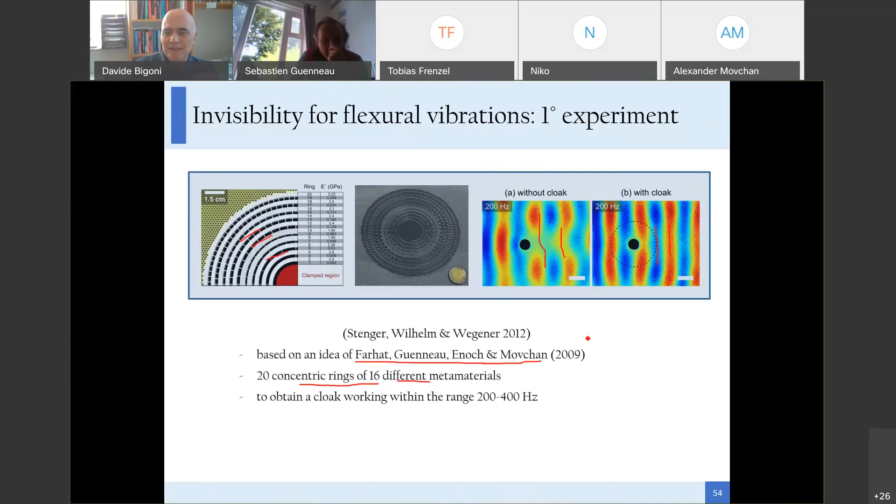A few years later, another experiment comes from people, actually some from my group - Diego Misseroni, Sasha, who was working in Trento at the time, and Ian Jones, Natasha, and Daniel Colquitt. Again, this is based on a clever idea, and it works with 10 rings of beams following the so-called cloaking transformation rule. We have a plate with a square hole, and if we look carefully, we see all these layers of curved beams.

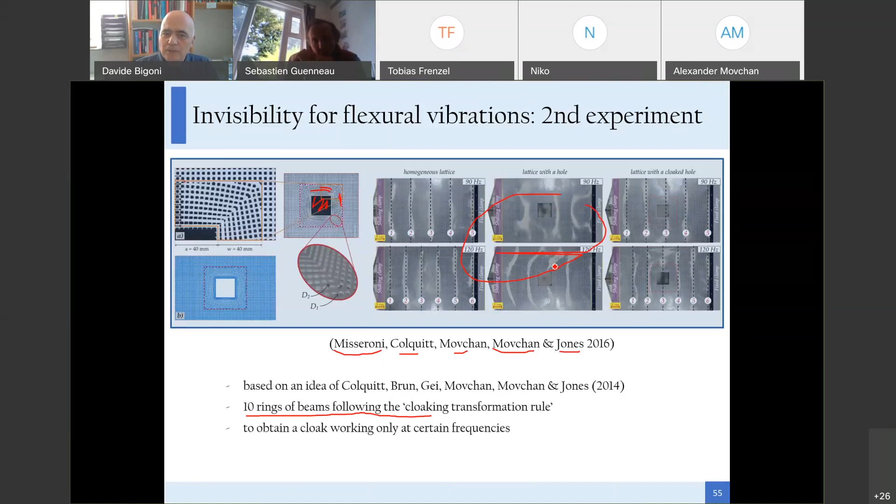So the experiments are here. I don't want to enter into details. They work with sand, and they show that cloaking can be achieved, but it works only at a certain specific frequency. So our idea was, can we do better than this?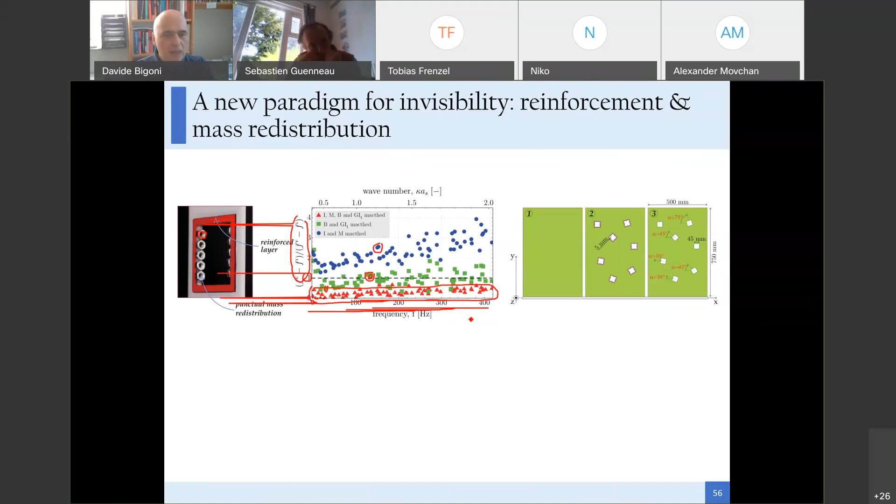And now I don't want to show you any theory. I would like to show you experiments. And I would like first of all to introduce this experiment. We have a plate here, number one, which is intact.

We have the same plate, number 3, where we have cut 3 equally spaced and equal holes. And we have plate number 2, where the same holes have been reinforced and with their mass redistributed.

The idea of this experiment is to shake the bases of the 3 plates simultaneously, to show that plate number 1 and plate number 2 have the same critical resonant frequencies, while plate number 3 has different resonant frequencies. So when plates 1 and 2 are resonant, plate 3 will do nothing, will be undeformed. And vice versa, when plate 3 is under resonance, the other two will do nothing, will be almost undeformed.

And now let's see the experiment. So we see our comparison between the three, all shaken the same way. And let's look for the eigenmodes. This is the experimental setup.

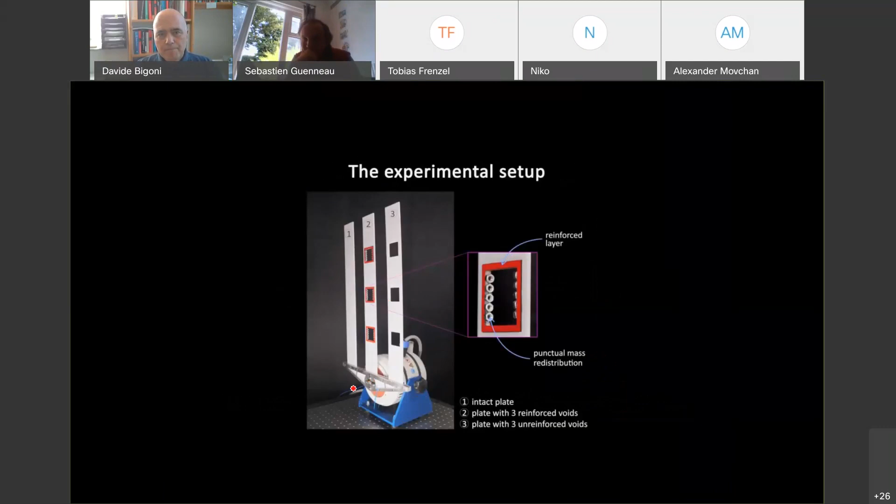First resonant mode, we see that these two plates do the same, while the other does nothing because it's not at resonance. Now the unreinforced void is at resonance, the other two do nothing. So they behave the same. Same thing for the second resonant mode.

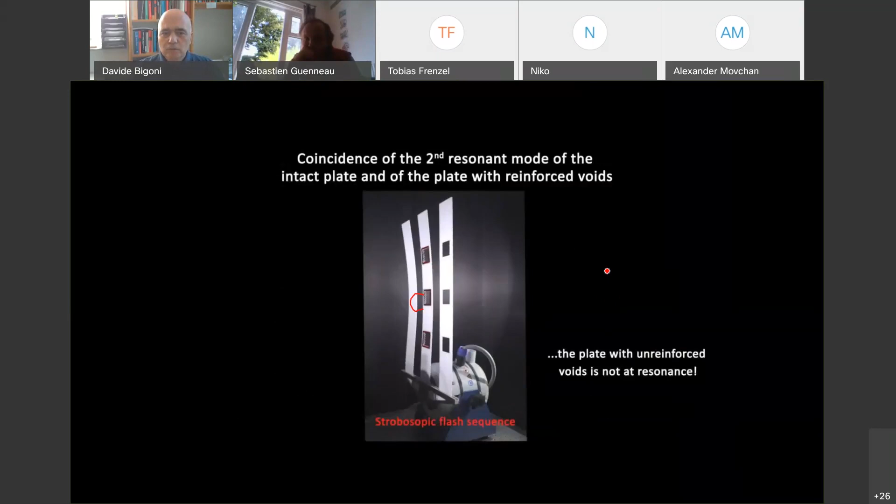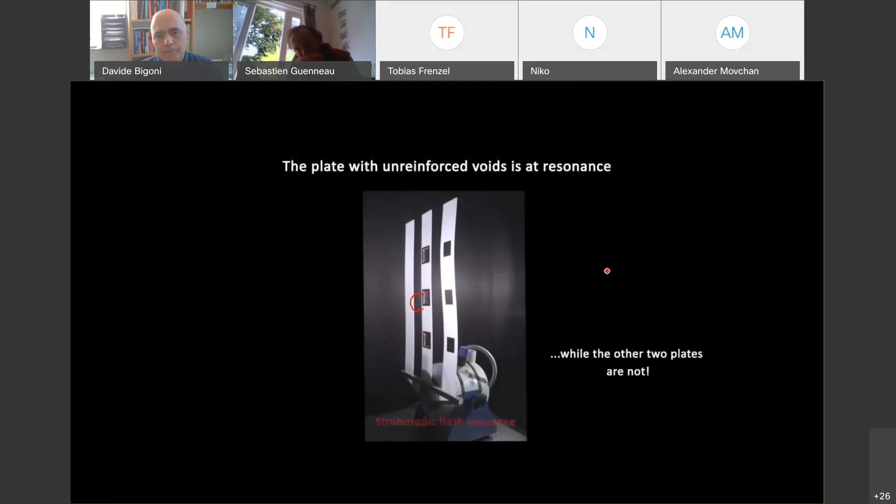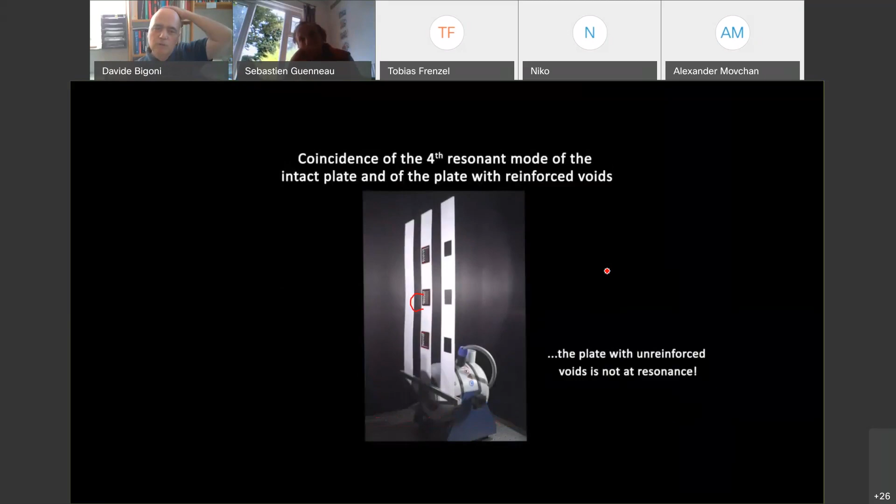Now the unreinforced plate is under resonance, the other two behave the same. Third resonant mode, same thing, same method. So the reinforced plate and the intact plate behave almost the same. Fourth resonant mode, same thing. So up to the fourth resonant mode, the reinforced plate and the intact plate behave exactly the same.

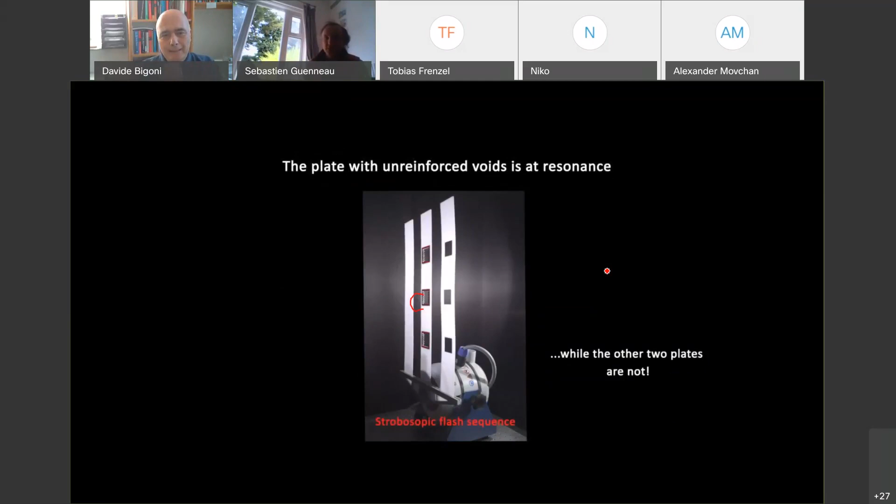Now you might ask me why we didn't try higher frequencies. Because the experiment becomes difficult, since the deformed shape is so small that it's difficult to detect. So we were interested to continue studying the vibration of the plates, and we did it numerically.

With the first arrangement, we have shown that the resonant modes coincide up to the 15th mode. So they continue to be identical for a broad range of resonant frequencies. But we wanted also to prove that what we found works also when torsional effects are dominant.

So we said, why not put many voids in a disordered way? Here we see 7 voids randomly disposed and with random inclinations. And again, we would like to compare on the left the intact plate with the reinforced voids and the plate perforated with the void without any reinforcement.

We did not do the experiments for this, but we did the numerical simulations. So I will show you in a second a movie with the numerical simulation, where the message is that the reinforced voids behave very well, almost identically to the intact plate.